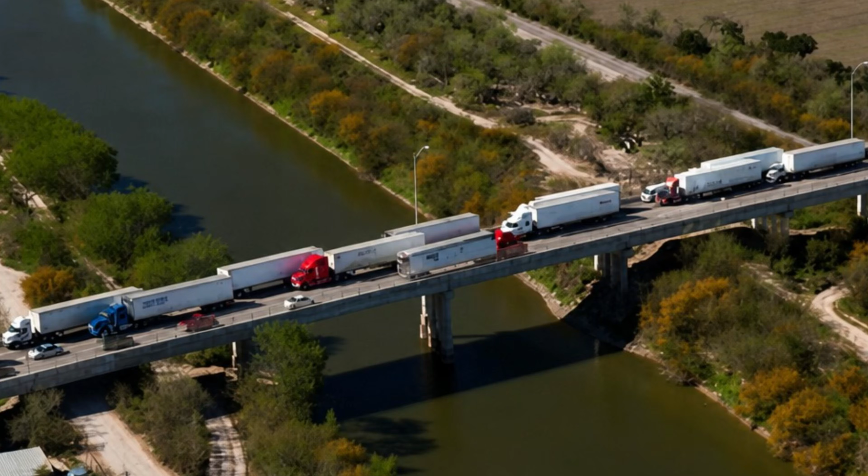You have driven over it 100 times without a thought. The river below is brown and slow and tells you nothing. But 40 feet down, in water so dark he works by touch alone, a diver runs his glove along the base of a concrete pier and feels the riverbed simply fall away beneath it. What he found there closed the bridge by morning.

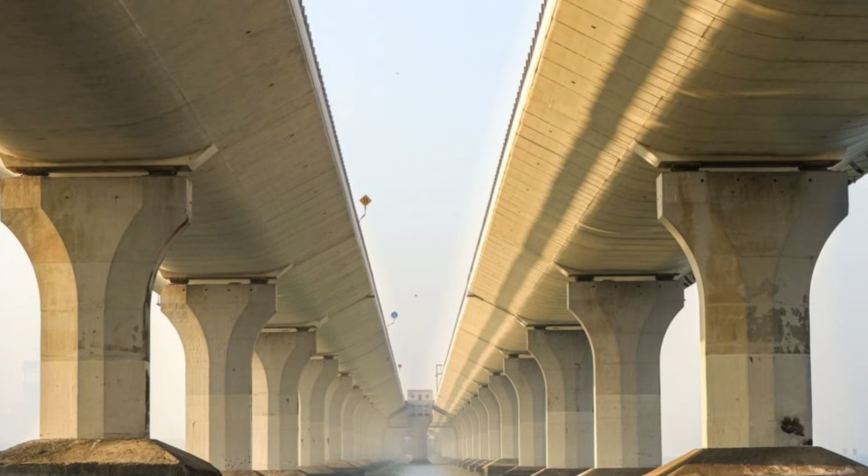There is a line we have all quietly agreed not to look past, and it is the surface of the water. Above it, a bridge is a solved problem. It is engineering, permits, guardrails, the reassuring hum of tires on the deck. You trust it the way you trust the floor of your own house. Below the waterline, though, the bridge becomes something else entirely.

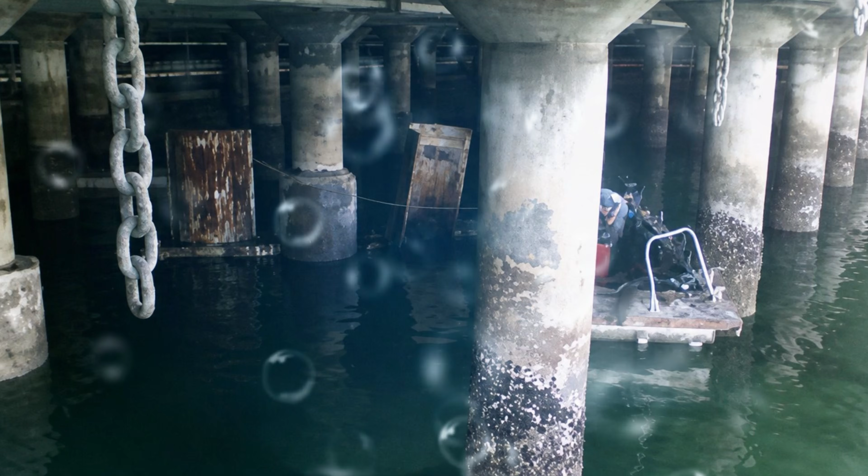It becomes a set of concrete legs standing in moving water, in the dark, in the mud, where no driver will ever look, and almost no one ever goes. That is where a bridge actually lives or dies. And that is the part of it we have decided, as a country, simply not to think about. The only people who look are the divers.

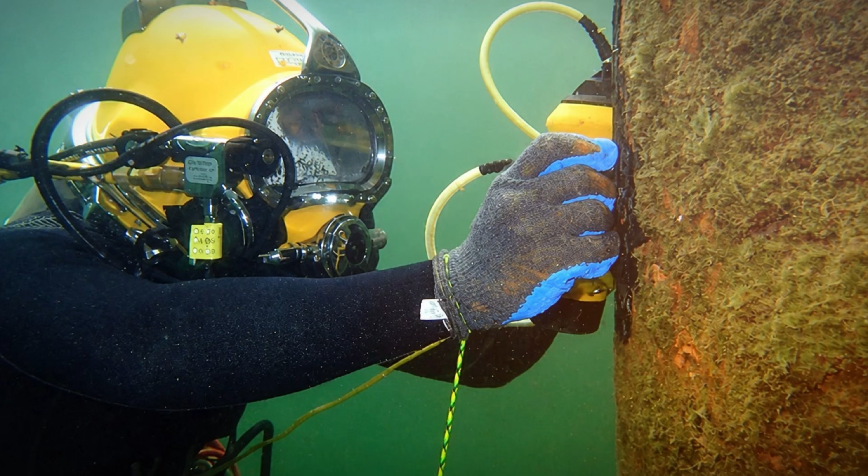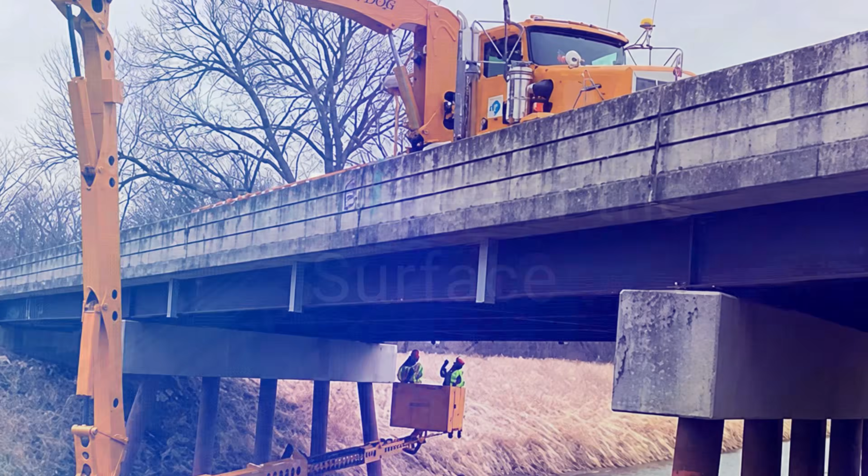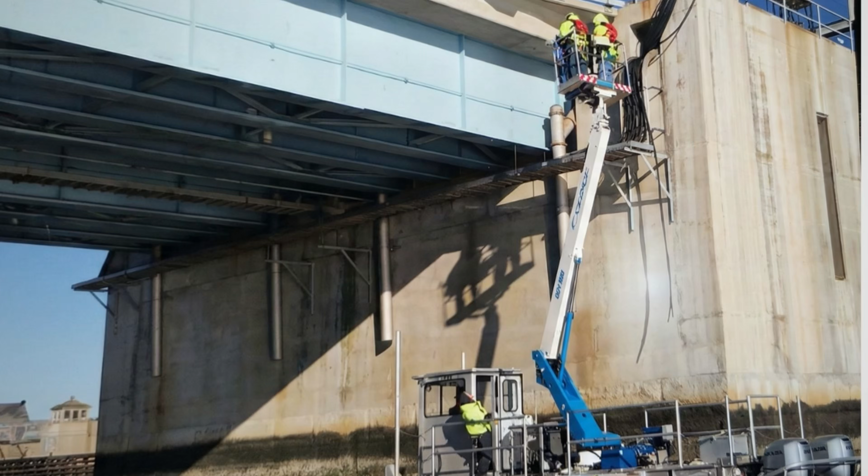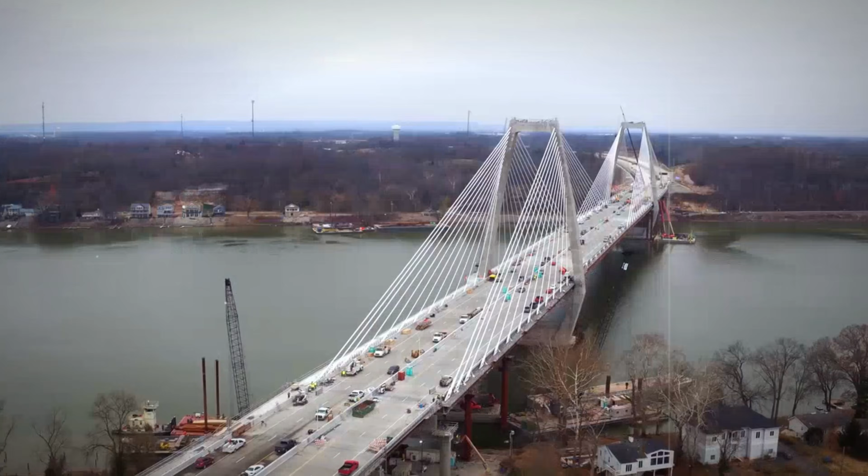Now, let's go beneath the waterline. Here is something most Americans have no idea is true. By federal law, nearly every bridge in this country that crosses more than about 20 feet of water has to be inspected underwater on a fixed schedule, generally once every 5 years, not looked at from a boat, not photographed from the bank. Inspected by a human being in the water, hands on the structure, checking the parts of the bridge that the public will never see and never think about.

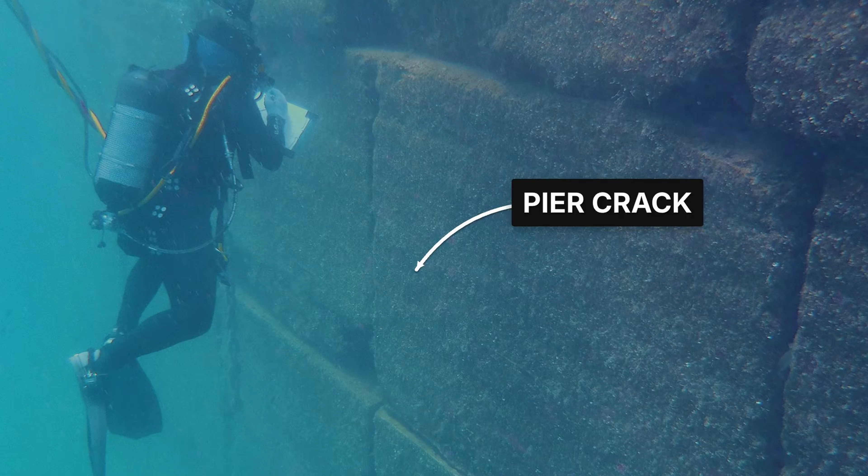And these are not weekend scuba hobbyists. Many of the divers sent down are engineers first and divers second, people trained to read a crack in a pier the way a doctor reads an x-ray, who happen to also be certified to do it 60 feet down in a river. They go under the interstate, into the harbor, beneath the county road over the creek, and they feel their way along concrete and steel and timber that has been sitting in the current since before most of us were born.

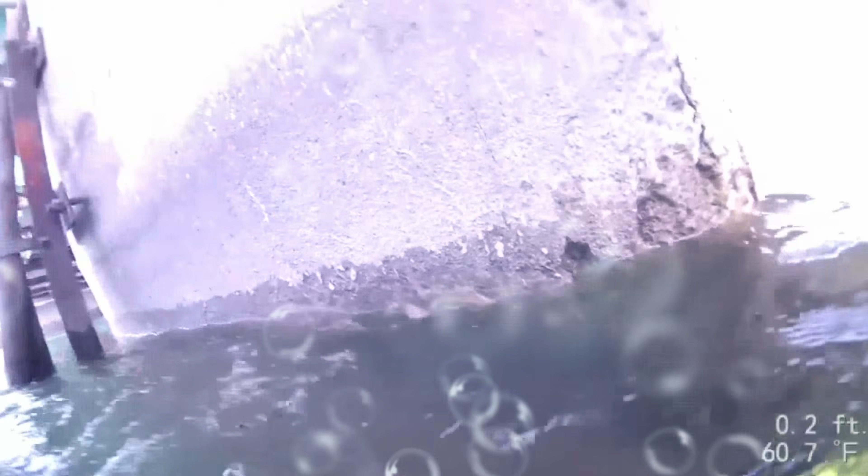The conditions are worse than you are picturing. In a lot of American rivers, visibility underwater is measured in inches. Divers describe working by what they call the Braille method, with water so brown and churned that they cannot see their own hand against the pier, so they read the entire structure with their fingertips. They run a gloved hand slowly down a column, feeling for cracks, for soft rotted wood, for the ragged edge where solid concrete turns to crumbling nothing.

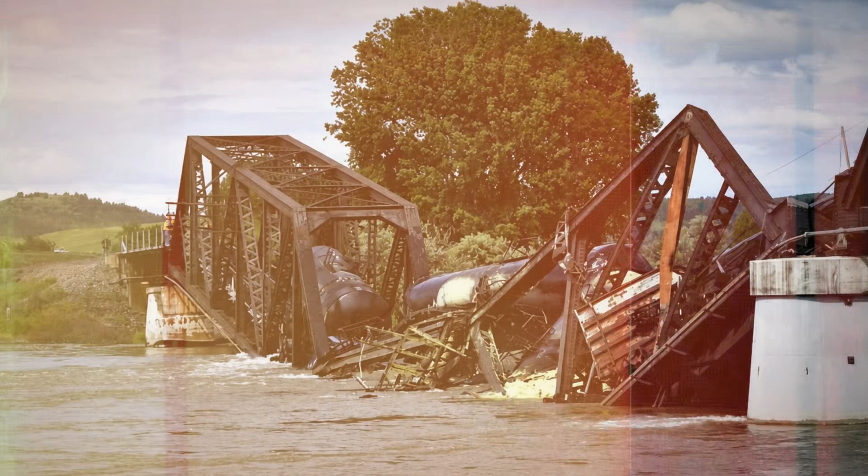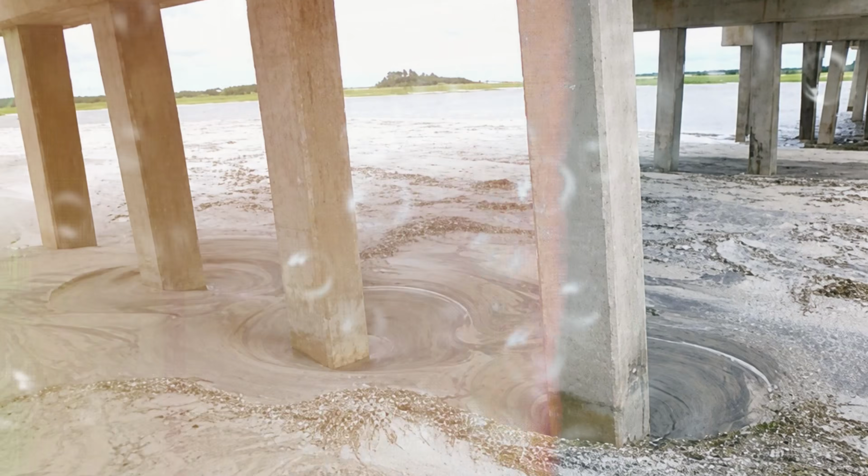They reach the base of a pier and feel for the one thing they fear most, the thing that has quietly killed more bridges in America than anything else. They are feeling for the ground. Because the enemy down there is not usually a dramatic crack or a rusted beam. It is the disappearance of the riverbed itself. Engineers call it scour, and it is the single leading cause of bridge failure in the United States.

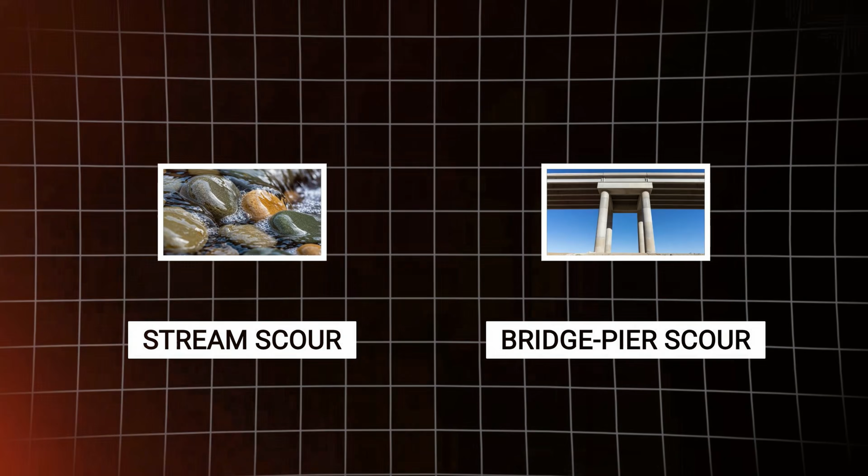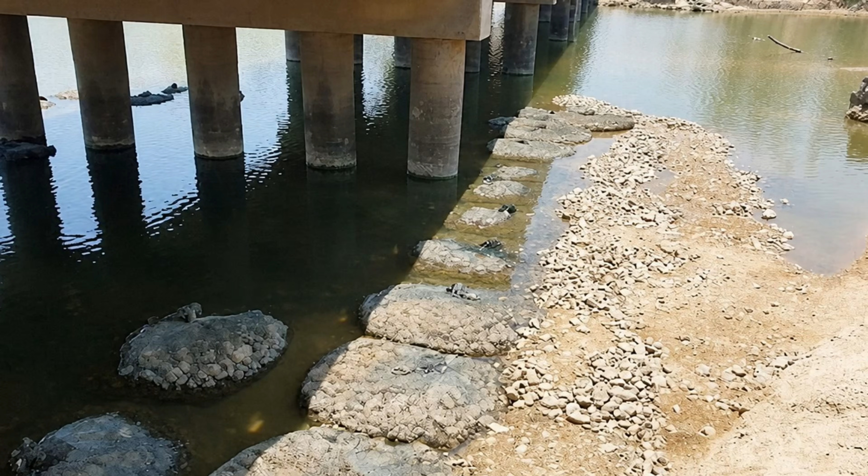Scour is simple and merciless. Water moving fast around a bridge pier speeds up, curls, and digs the same way a stream carves a hole around a rock. Over years, and especially during a single hard flood, that current lifts the sand and gravel out from around the base of the pier and carries it downstream. The pier was built to stand on that material. Now there is a pit where the support used to be.

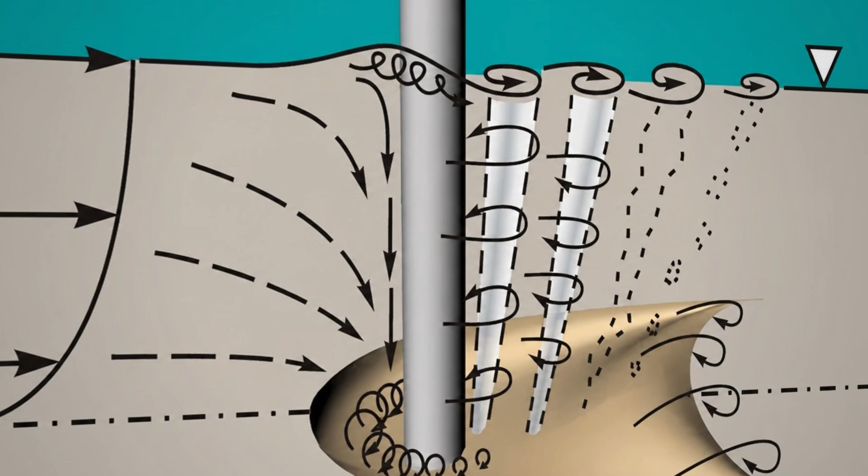Push it far enough and the water eats down past the footing, the wide concrete pad the whole pier stands on, until the leg of the bridge is hanging over a hollow it can no longer feel the bottom of. Nothing on the surface changes. The bridge looks exactly the same from your car. The failure is entirely underwater, entirely invisible, and it is only a matter of how long before the leg tips, which brings us back to the diver and to what actually happens when one of them reaches the bottom of a pier and the stream bed is not where it is supposed to be.

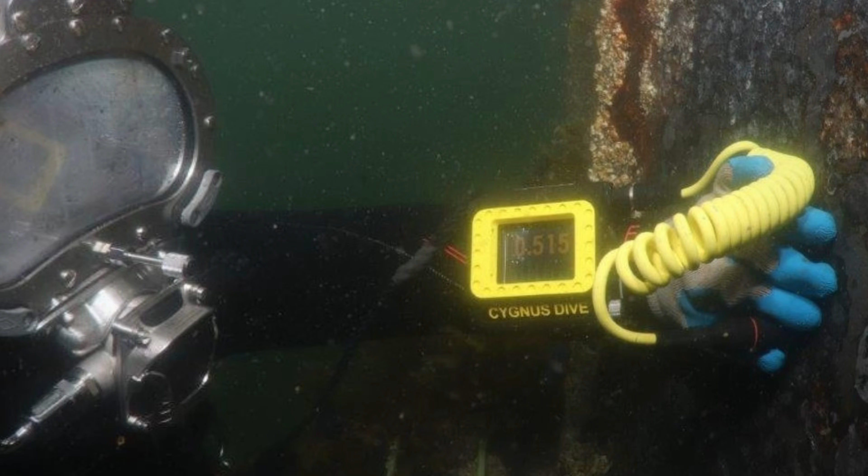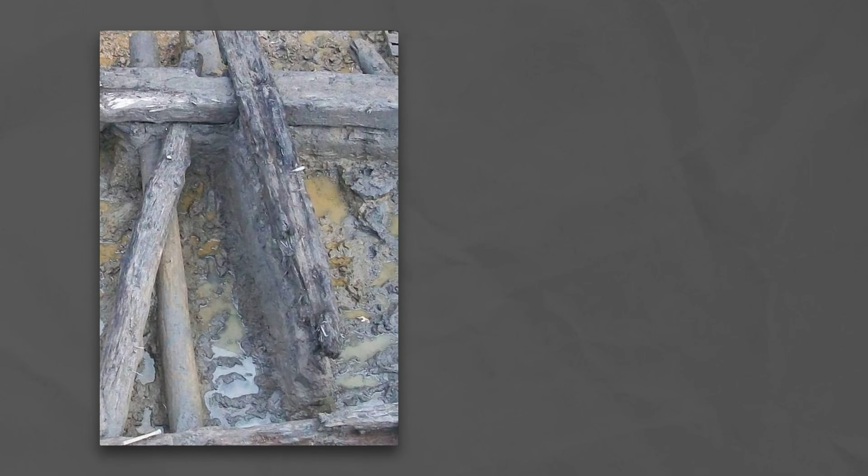In 2025, in rural Prince Edward County, Virginia, that is exactly what happened. Divers went under a bridge on Route 612 and found significant scour at one of the piers. When they measured it, the numbers were bad in the specific way that ends a debate. The current had undermined the pier's timber pile foundation, and stripped the riverbed down roughly 3 feet below the bottom of the footing, along the entire length of the pier.

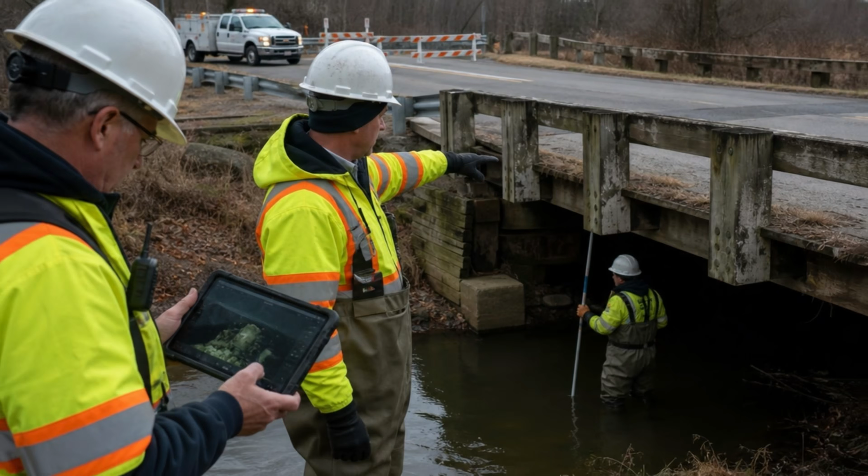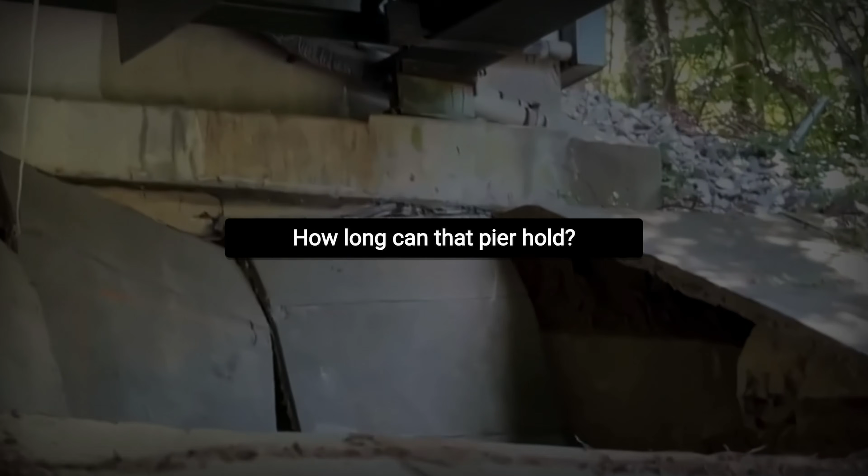8 of the 18 piles holding that pier up were no longer buried in anything. They were just standing there in open water, exposed, doing a job they were never designed to do without the earth packed around them. The Virginia Department of Transportation did not schedule a study or open a comment period. They issued an emergency closure and shut the bridge that day, because the honest engineering answer to how long until that pier moves is nobody knows, and you do not gamble a school bus on nobody knows.

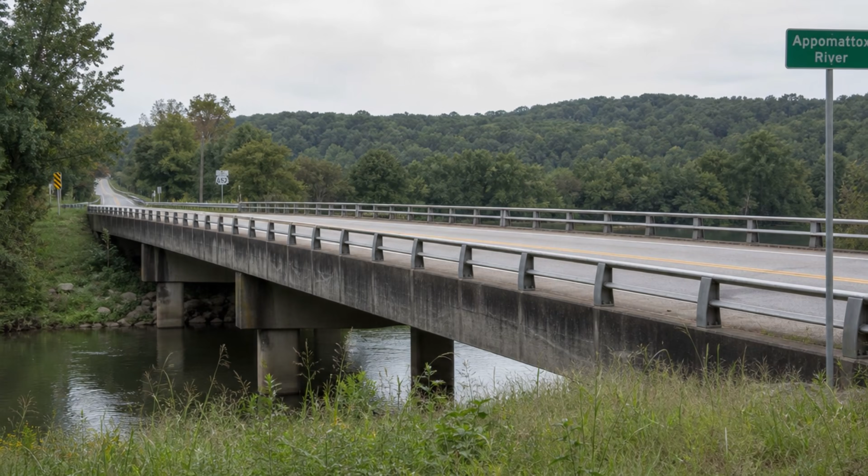A road that a whole community used was simply gone overnight, detoured for miles, because of something no one driving over it could have seen or felt or suspected. The bridge above the water was fine. The bridge below it had been quietly failing for years.

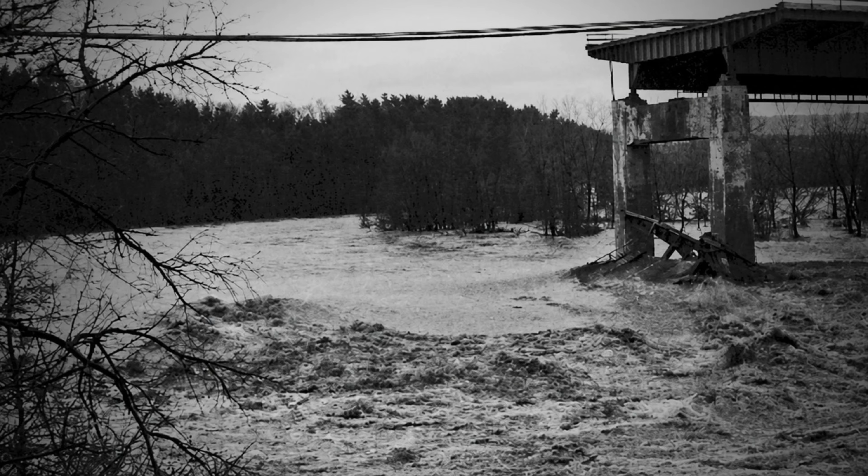If that sounds like an overreaction, you need to understand why the people who do this job never, ever wait. You need to understand what they are haunted by. On April 5, 1987, the New York State Thruway crossed Schoharie Creek on a bridge that had carried Interstate 90 without incident since 1954. That spring, days of rain had swollen the creek into a violent, muddy flood.

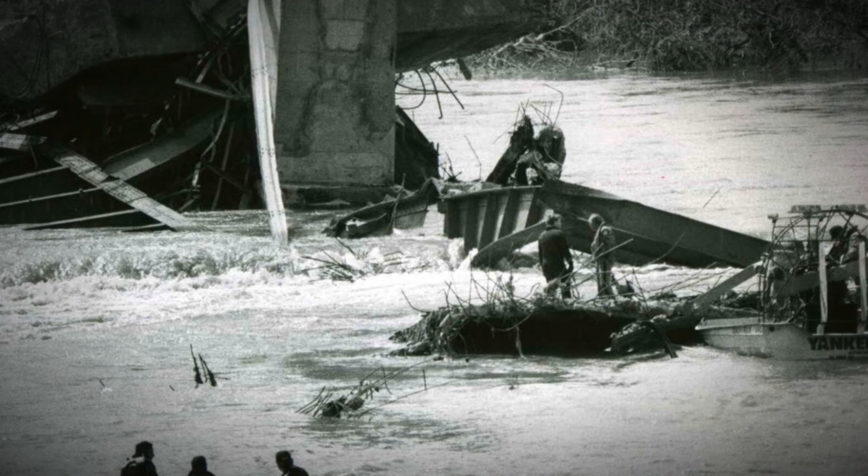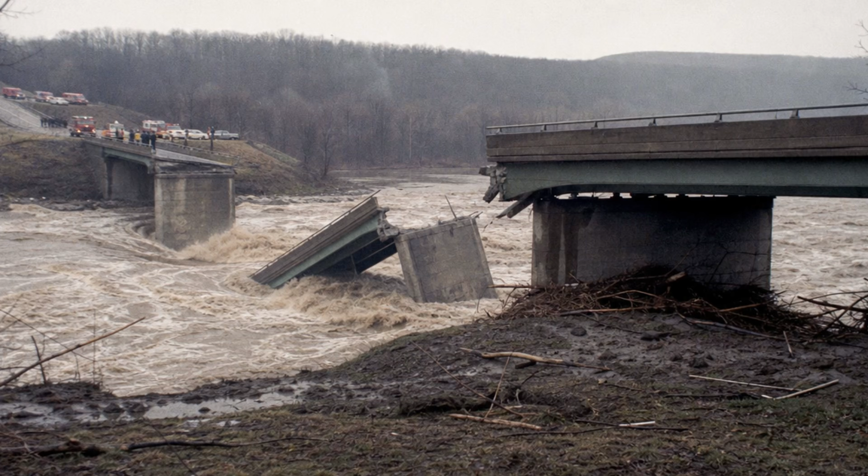Deep underwater, unseen by anyone, the current had spent years and then finally days digging the stream bed out from under one of the piers. Scour, the same quiet process, doing exactly what it does. That afternoon, the undermined pier finally lost its footing and dropped, and a span of the bridge fell about 80 feet into the flood. Cars drove off the broken edge into the water before anyone could stop them.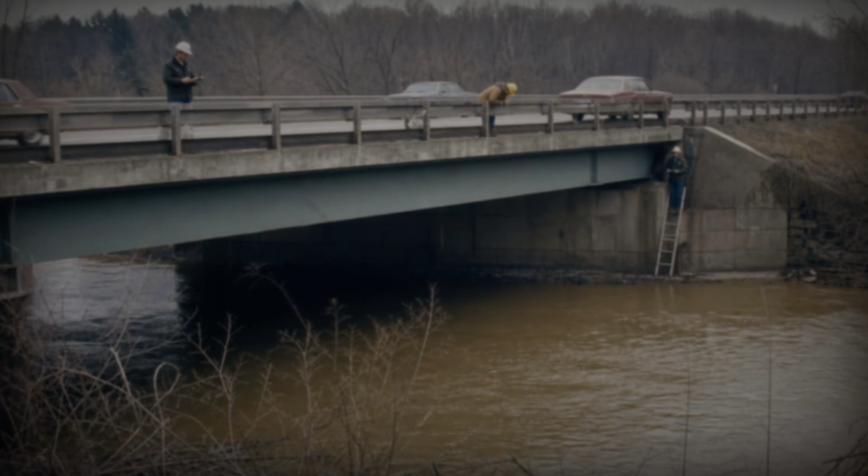About 90 minutes later, with rescuers already on scene, a second pier let go and another span came down. 10 people were killed. There had been no warning anyone could act on because the thing that was failing was underwater, out of sight, in a place nobody was required to inspect.

Schoharie Creek is the reason so much of this now exists. The disaster helped force the country to take the underwater half of its bridges seriously, to write the rules that now send divers down every 5 years to feel for exactly the hollow that killed those 10 people. It was not the only warning.

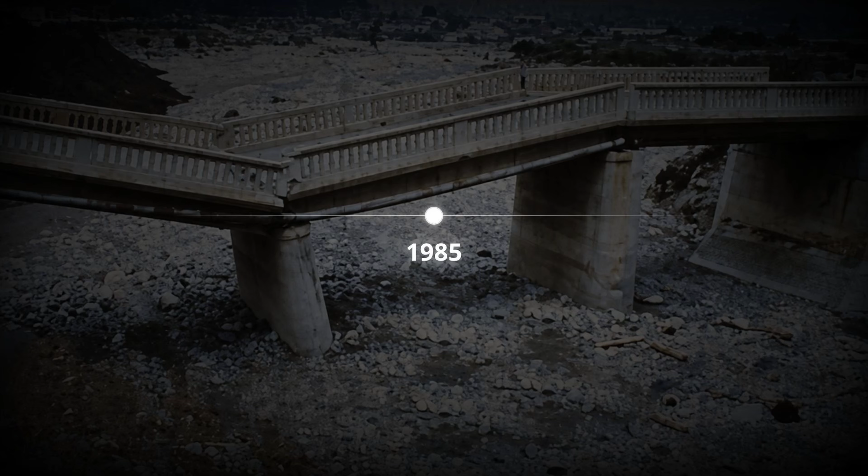2 years earlier, in 1985, a bridge over Chickasaw Bogue Creek near Mobile, Alabama, gave way and dropped a section of roadway out from under traffic. A Ford van went airborne off the collapse, struck one of the fallen piers, and sank in about 20 feet of water. And the driver, almost unbelievably, climbed out with minor injuries.

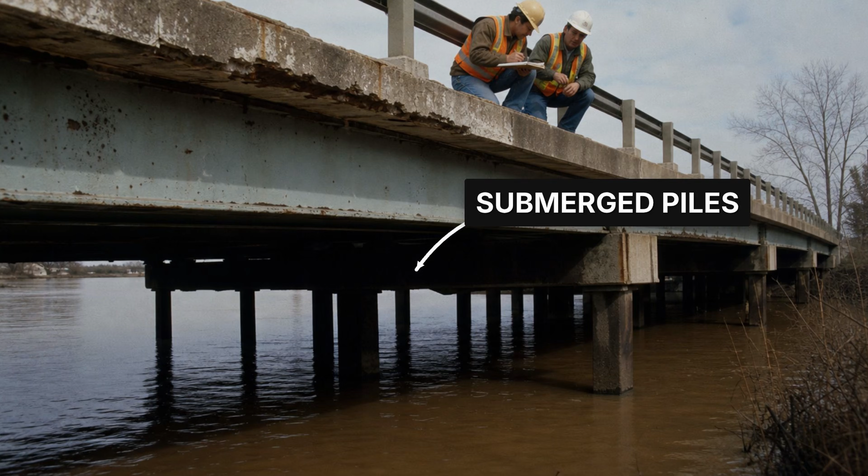Investigators found the cause was undetected deterioration of the steel piles holding the bridge up. Undetected. The word does all the work. The bridge had been rotting where no routine inspection was looking, and it kept carrying cars right up until the second it couldn't. In the aftermath, federal highway officials pushed every state to build a real underwater inspection program. And within a few years, the requirement was written into national standards.

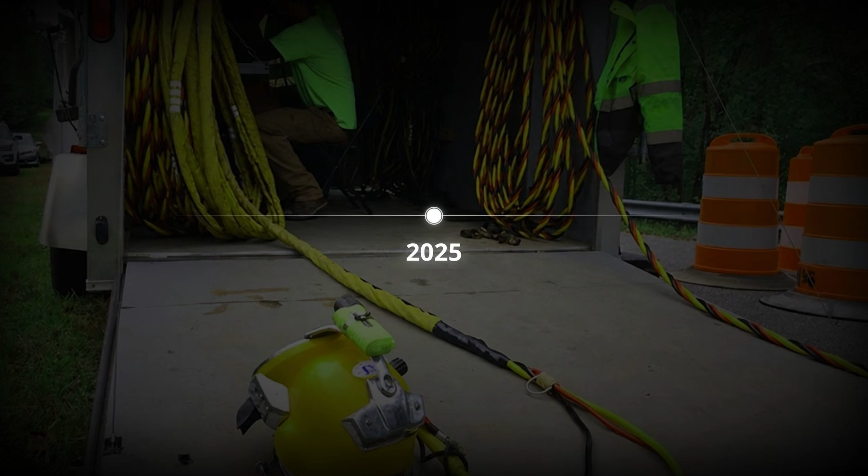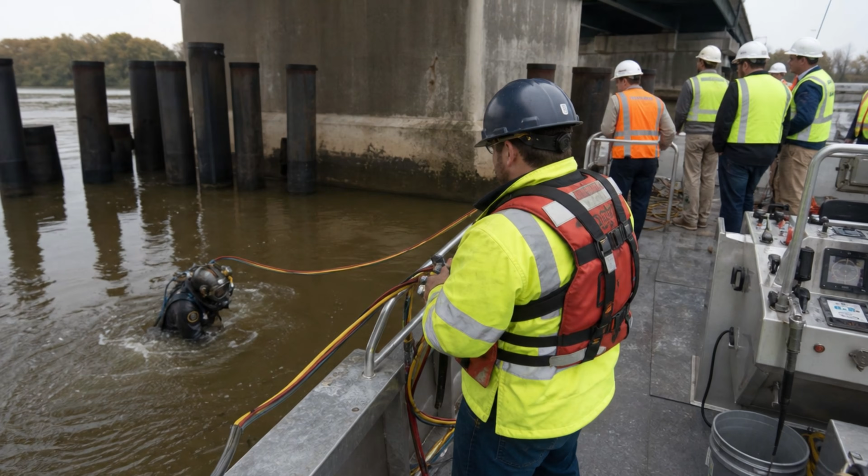That history is why a diver in a Virginia creek in 2025, feeling 8 bare piles in the current, does not file a report and go home. He surfaces, and the bridge closes. Everything about the modern system is designed so that what was found beneath Schoharie Creek is never found too late again. And here is the part that should genuinely change how you see the drive home.

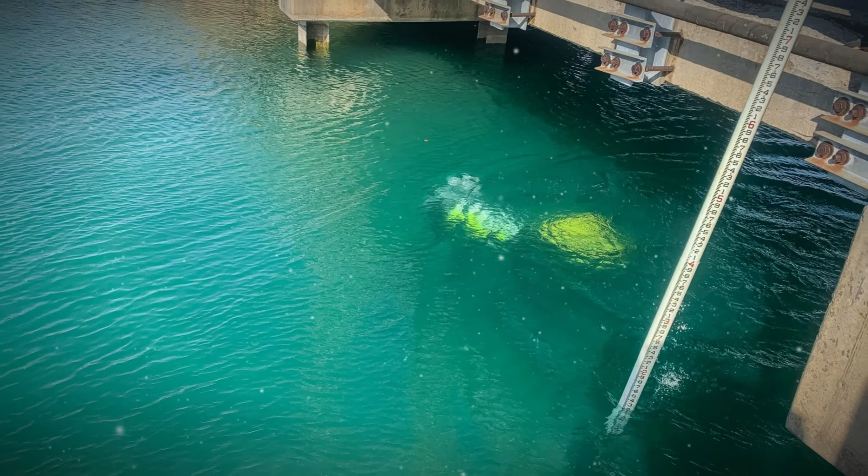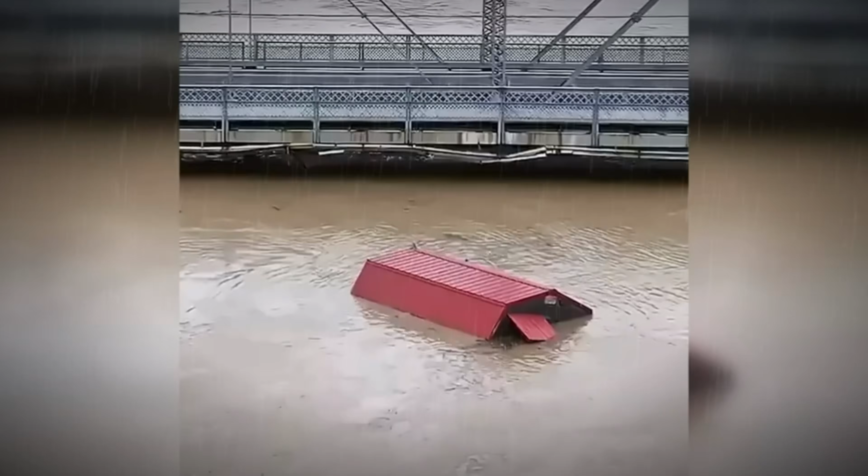This is not rare. Scour has been blamed for roughly 6 out of 10 bridge failures in this country. Of the major bridge failures studied across one 15-year stretch, more than half traced back to the current eating out the ground around the piers. Every bridge over moving water is exposed to it, all the time, and a single big flood can undo in one night what stood for 50 years.

Nor is scour the only thing waiting down there. In warmer, saltier water, the divers are hunting a different killer entirely. Marine borers, small organisms that tunnel into the wooden piles that hold up thousands of older American bridges and hollow them out from the inside.

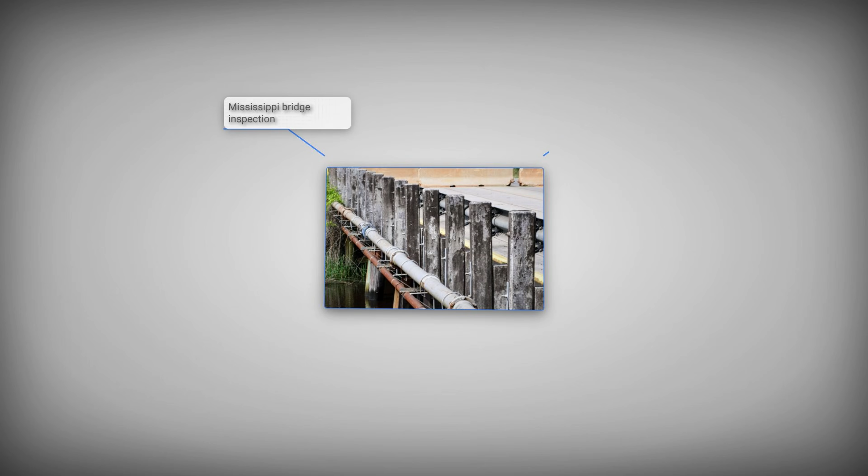On a bridge in Mississippi, inspectors documented years of exactly this. Outer shells decayed, voids and borer holes riddling the timber piles below the waterline, until the structure had to be emergency repaired before it could safely carry traffic again. A wooden pile can look perfectly sound where it meets the air and be a fragile shell an inch under the surface, eaten out by things too small to see. Only a diver with his hand on it, pressing, feeling it give, will ever know.

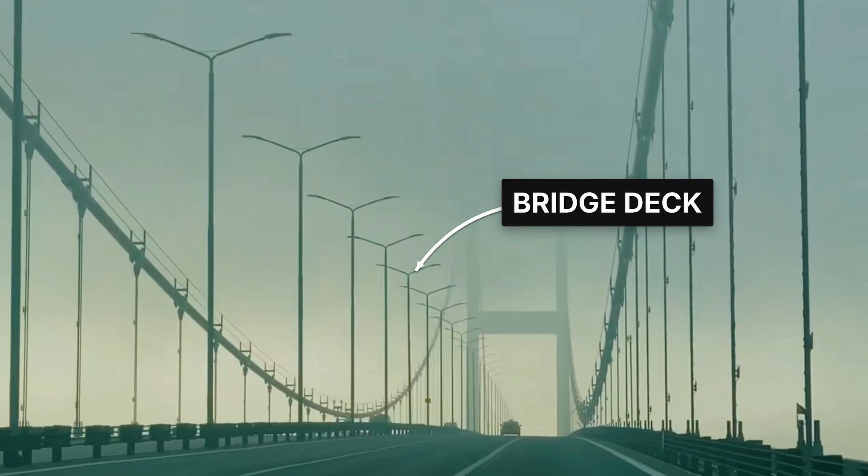So think about what that means the next time you cross water. The deck under your tires tells you nothing. The pretty railing tells you nothing. The slow brown river tells you nothing. That is the whole point of it, that a river's surface is a perfect liar about what is holding still underneath.

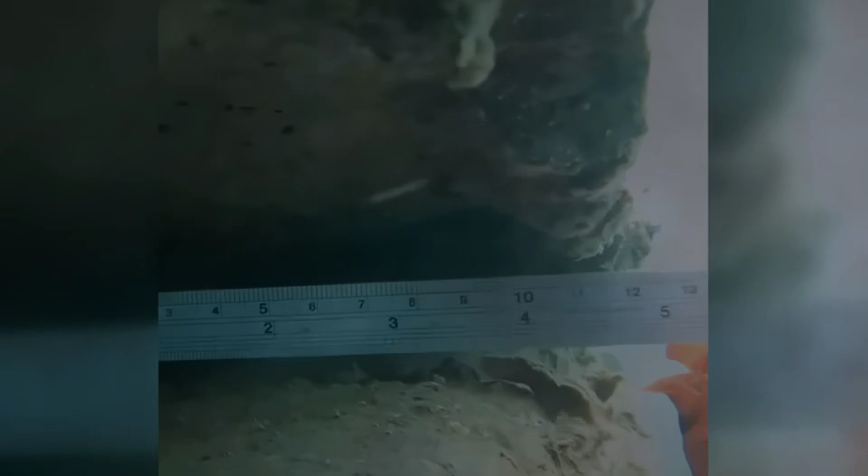Everything that determines whether that bridge lives or dies is happening in a place you cannot see, in the dark, in the cold, where a current has spent decades patiently digging, and where the only warning you will ever get is a diver coming up out of the water with a measurement in his head and a decision already made. Most of the time, the news is fine.

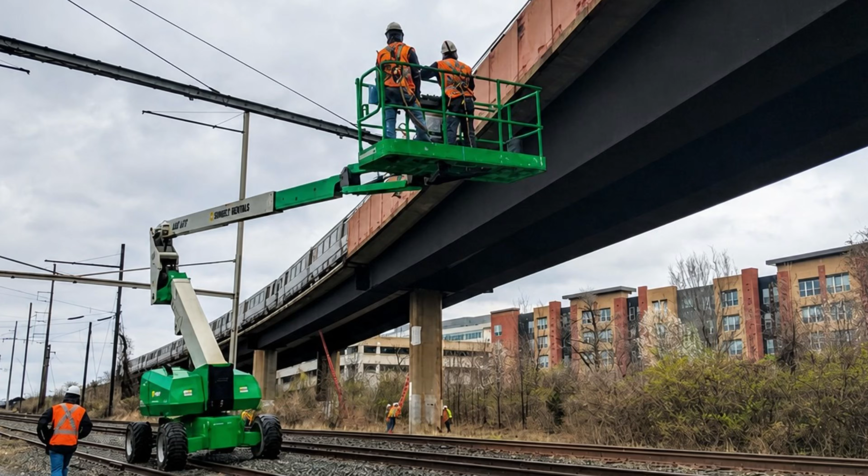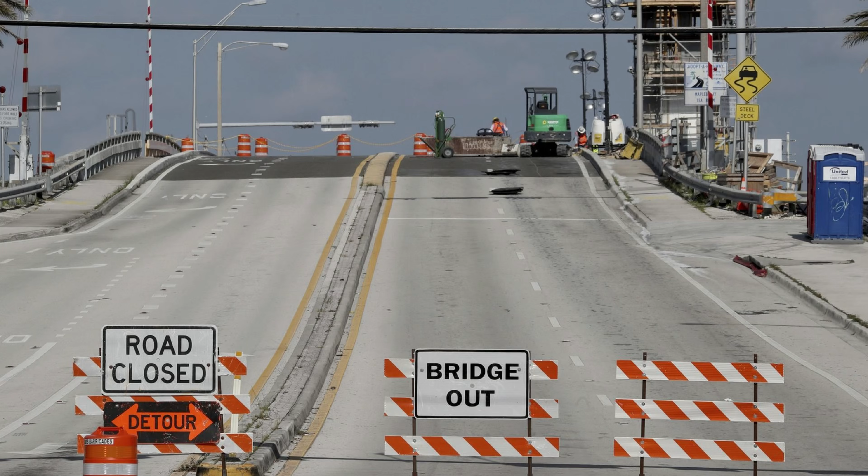The piles are buried, the concrete is sound, the stream bed is where it should be, and the bridge earns another 5 years. But every so often, a diver reaches the bottom of a pier and feels the ground fall away beneath his glove, and a road that thousands of people trusted without a second thought is closed by nightfall. Not because anything visible went wrong, but because someone finally went and looked at the half of the bridge we all agreed to pretend wasn't there.

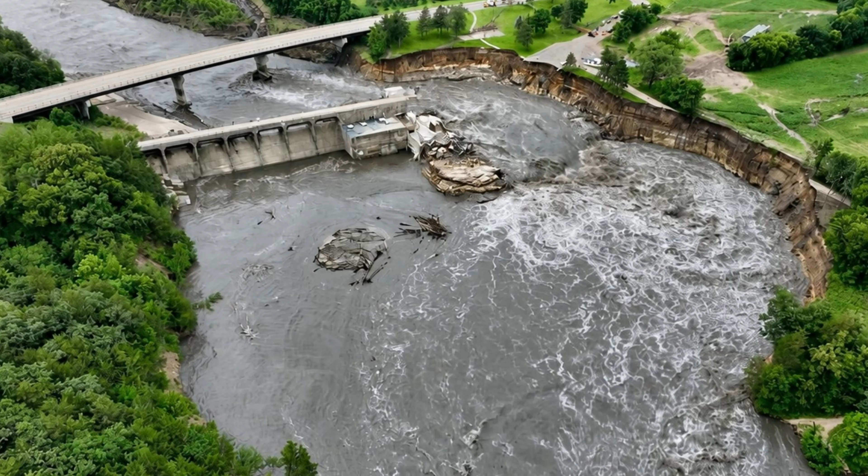The water is the same water whether or not you are looking at it. The current has been digging since long before the bridge had a name, and the surface of every river you cross tells you almost nothing about what is holding still beneath it, waiting the way it has always waited for someone brave enough to go down in the dark and put a hand on it.